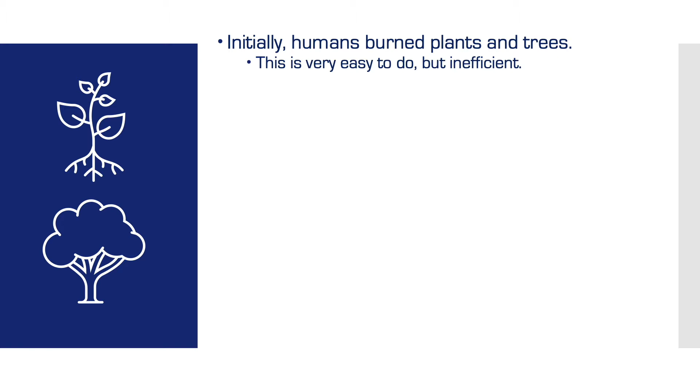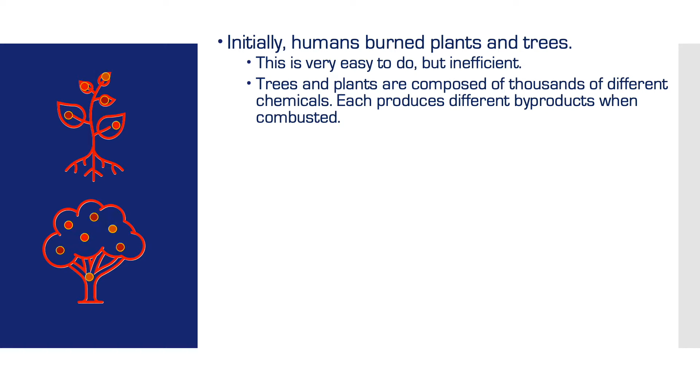Historically, civilizations can be classified by what type of and how much fuel they use to meet their energy needs. Initially, humans burned plants and trees. This is very easy to do, but inefficient. Trees and plants are composed of thousands of different chemicals. Each produces different byproducts when combusted. These byproducts can be harmful or foul equipment. They form soot.

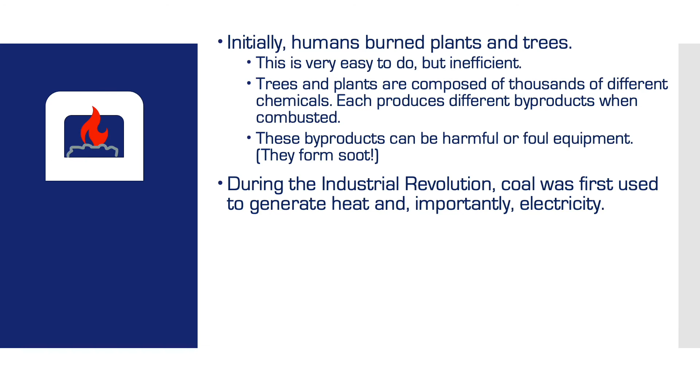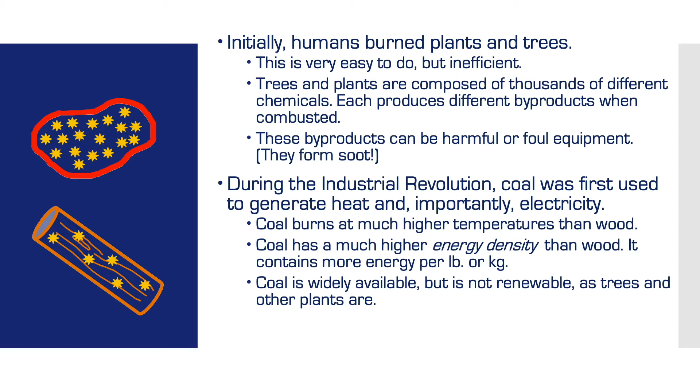During the Industrial Revolution, coal was first used to generate heat and, importantly, electricity. Coal burns at a much higher temperature than wood. Coal has a much higher energy density than wood. It contains more energy per pound or kilogram. Coal is widely available but is not renewable, as trees and other plants are. Additionally, coal is a very complex mixture, similar to plants, so it is very difficult to purify.

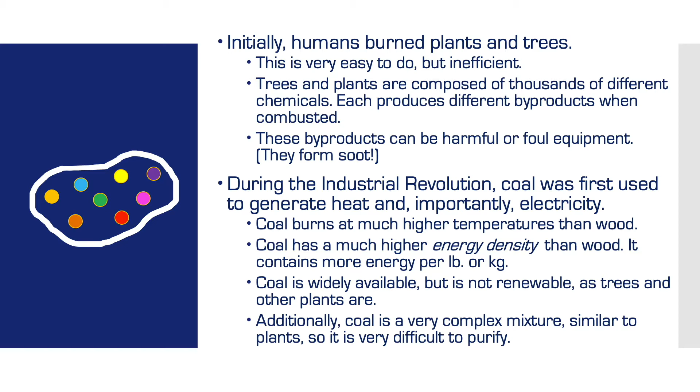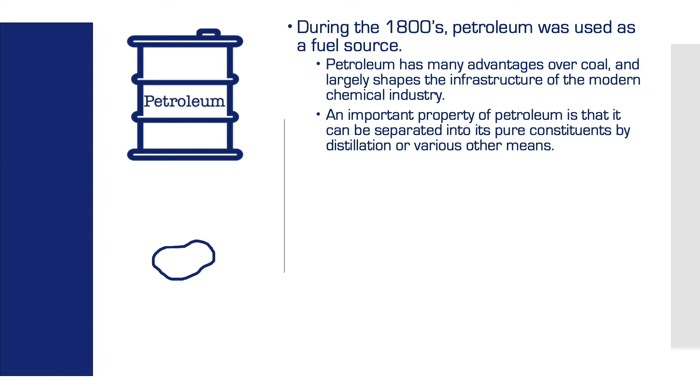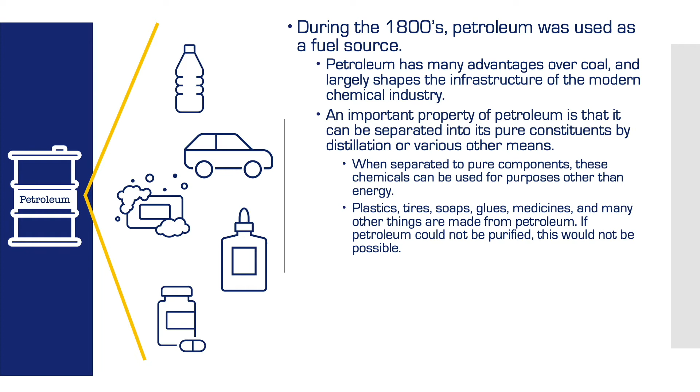During the 1800s, petroleum was used as a fuel source. Petroleum has many advantages over coal and largely shapes the infrastructure of the modern chemical industry. An important property of petroleum is that it can be separated into its pure constituents by distillation or various other means. When separated to pure components, these chemicals can be used for purposes other than energy. Plastics, tires, soaps, glues, medicines, and many other things are made from petroleum. If petroleum could not be purified, this would not be possible.

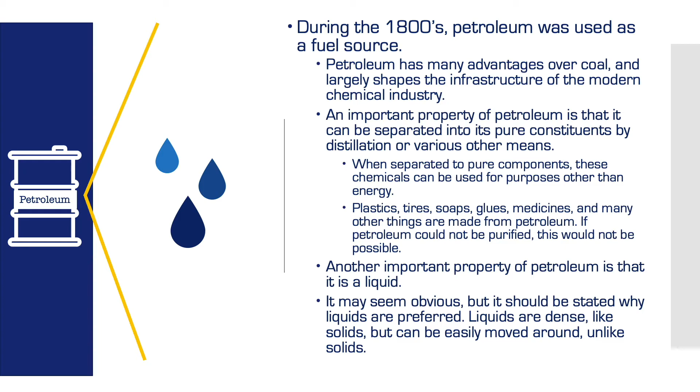Another important property of petroleum is that it is a liquid. It may seem obvious, but it should be stated why liquids are preferred. Liquids are dense, like solids, but can be easily moved around, unlike solids. Where do we get our energy today?

While coal and petroleum are still widely used, natural gas is rapidly replacing petroleum and coal as a source of energy. Renewable sources are increasing as well, but not nearly as quickly as natural gas. This is because horizontal fracturing has made vast reserves of natural gas available in the United States. Natural gas is more carbon efficient than coal or oil, less carbon dioxide per BTU. Natural gas is more easily harvested than coal.

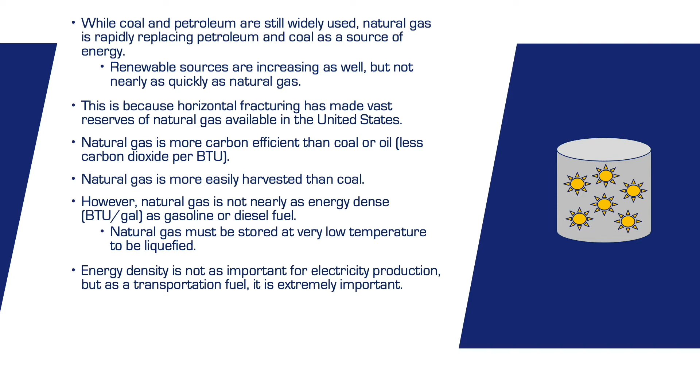However, natural gas is not nearly as energy dense, or BTU per gallon, as gasoline or diesel fuel. Natural gas must be stored at very low temperatures to be liquefied. Energy density is not as important for electricity production, but as transportation fuel, it is extremely important. So, what does this mean? To utilize natural gas as a transportation fuel, it must be converted. This conversion is complex, and nearly every step requires a catalyst.

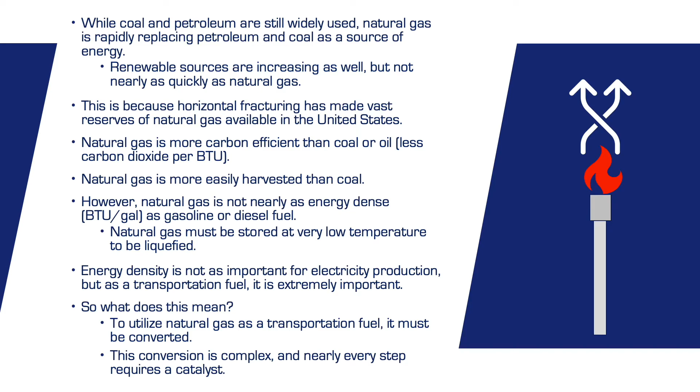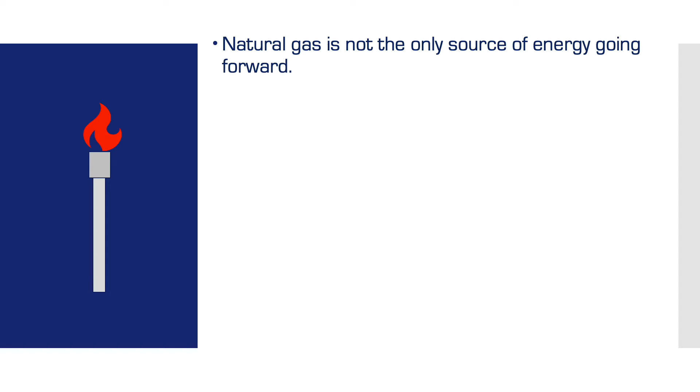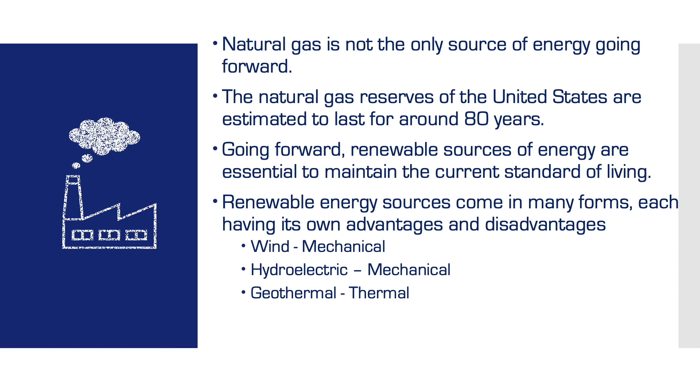Where might we get our energy in the future? Natural gas is not the only source of energy going forward. The natural gas reserves of the United States are estimated to last for around 80 years. Going forward, renewable sources of energy are essential to maintain the current standard of living. Renewable energy sources come in many forms, each having its own advantages and disadvantages. Wind, mechanical. Hydroelectric, also mechanical. Geothermal, thermal. Solar, thermal/photovoltaic. And biofuels, chemical.

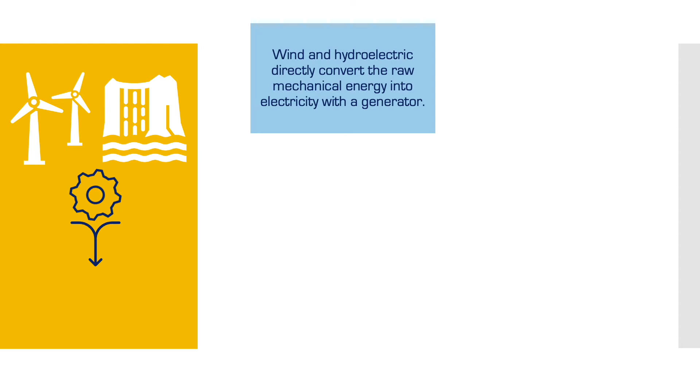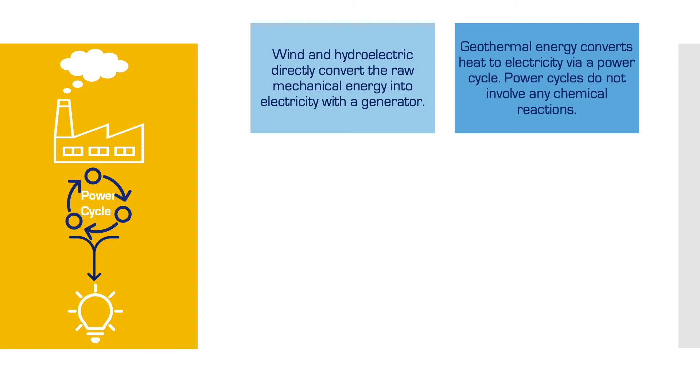Wind and hydroelectric directly convert the raw mechanical energy into electricity with a generator. Geothermal energy converts heat to electricity via a power cycle. Power cycles do not involve any chemical reactions. Solar energy usually involves the conversion of photons from the sun to the movement of electrons. This is not strictly a chemical process. Electricity is directly produced without any intermediate chemical reactions.

The above methods of energy are already used and well understood. Many improvements are sure to be made in the future. However, they can only directly produce electricity. If renewable chemical energy, fuel, is needed, then biofuels are an attractive option. What is likely to be the source of the future energy supply? Biofuels are any chemicals that are derived from living materials, biomass, and used directly as energy sources. That is, they are burned.

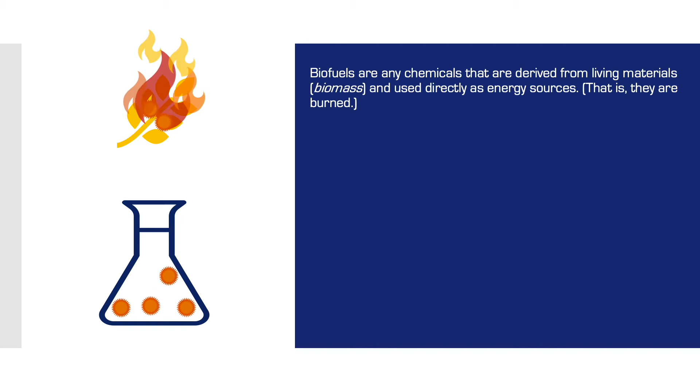Petroleum, coal, and natural gas all came from once living sources, but have been converted over millennia to their usable forms now. Because the living material must be converted, these sources are not considered biofuels. Biofuels were among the first energy sources used by humans. Humans have been burning plants for heat for at least 200,000 years, and for possibly as long as 1.7 million years.

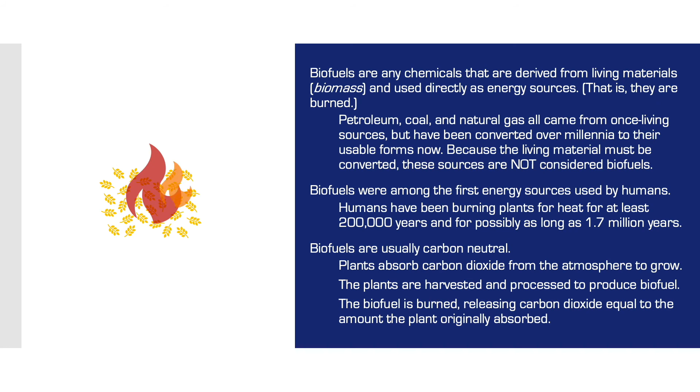Biofuels are usually carbon neutral. Plants absorb carbon dioxide from the atmosphere to grow. The plants are harvested and processed to produce biofuels. The biofuel is burned, releasing carbon dioxide equal to the amount the plant originally absorbed. So why is catalysis essential for these processes? What is different now from what we did 100,000 years ago?

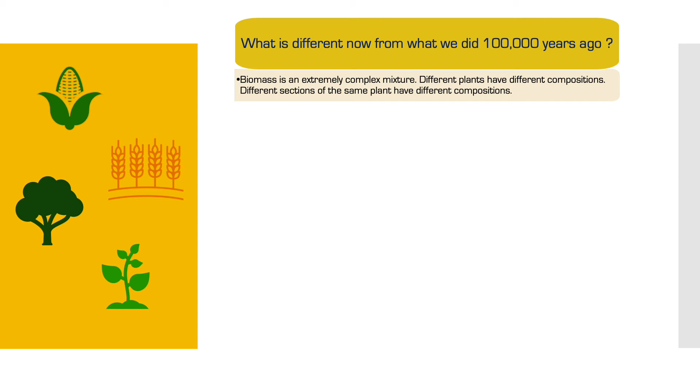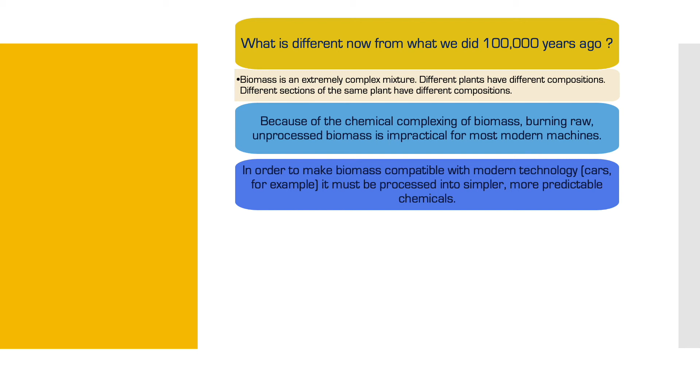Biomass is an extremely complex mixture. Different plants have different compositions, and different sections of the same plant have different compositions. Because of the chemical complexity of biomass, burning raw, unprocessed biomass is impractical for most modern machines. In order to make biomass compatible with modern technology, cars, for example, it must be processed into simpler, more predictable chemicals. To modify biomass to be compatible with modern technology, it must be chemically altered.

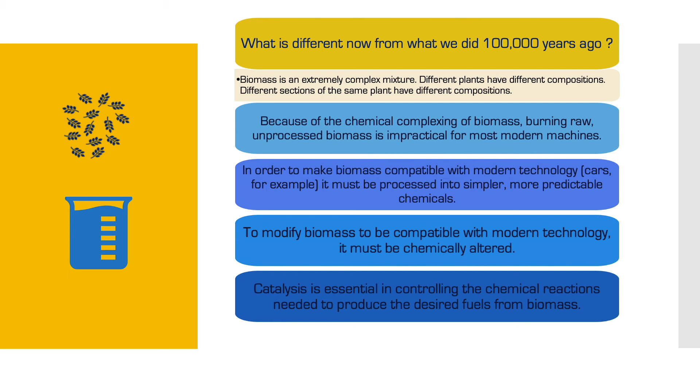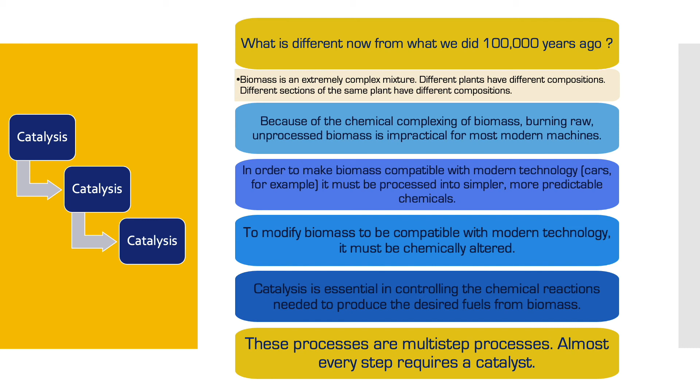Catalysis is essential in controlling the chemical reactions needed to produce the desired fuels from the biomass. These processes are multi-step processes. Almost every step requires catalysis. So what did we learn today? Currently, humans have varied energy needs. Electricity is produced at large, centralized power plants. Transportation, however, largely requires very energy-dense chemical fuels, liquids.

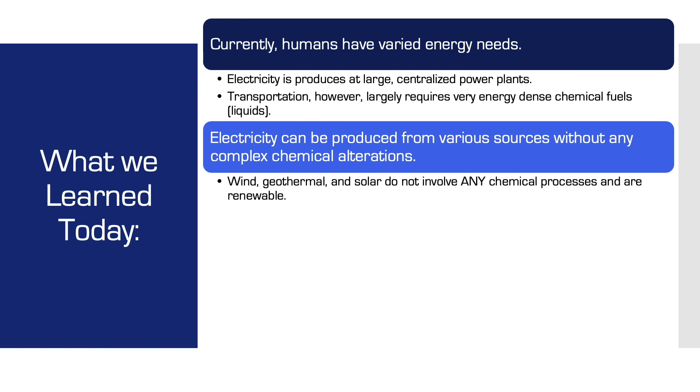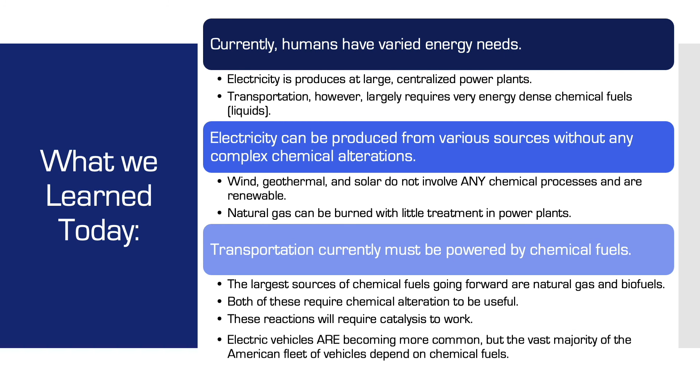Electricity can be produced from various sources without any complex chemical alterations. Wind, geothermal, and solar do not involve any chemical processes and are renewable. Natural gas can be burned with little treatment in power plants. Transportation currently must be powered by chemical fuels. The largest sources of chemical fuels going forward are natural gas and biofuels. Both of these require chemical alterations to be useful. These reactions will require catalysis to work. Electric vehicles are becoming more common, but the vast majority of the American fleet of vehicles still depend on chemical fuels.